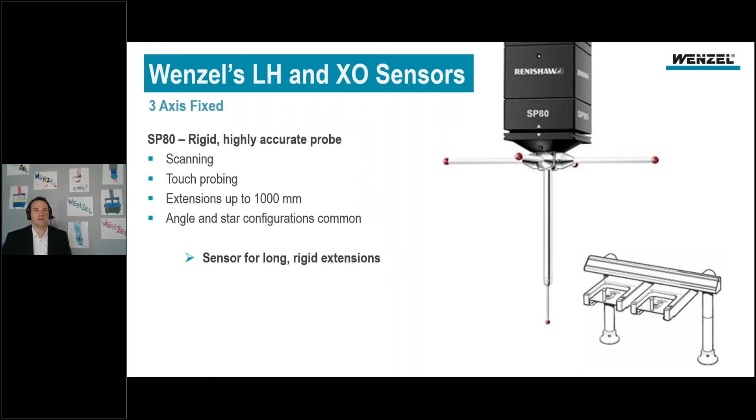So moving from a 3-axis fixed, we'll move into a 3-axis articulated probe. Articulation means we're still using the 3-axis of the machine to do the measurement. However, with a 3-axis articulated probe, you can now move the probe into different angles and positions. This eliminates the need for complicated configurations like star probes, crank probes, and allows more flexibility for the programmer to choose the angles they need.

This 3-axis articulated probe comes in 2 flavors, the PH10T and the PH10M. The PH10T is the most basic. It's for touch only, and you need to use manual threaded-in extensions. Where this would be appropriate is in an environment where you have very little changeover in parts, or maybe the parts are very simple, or where cost is of utmost importance for the customer.

Moving to the PH10M, M stands for multi-wire. This is essentially the most ubiquitous probe in the world. It allows you to use touch probes, physical scanning probes, and offers a wide range of compatibility with optical and laser sensors.

Because the PH10M is truly ubiquitous and is in almost every manufacturing shop in the globe, if you're a third-party manufacturer, you develop your sensor to fit on a PH10M. It could be a Nikon, it could be a Kreon, it could be something out there. Anything in the world, you're going to design it to probably work with a PH10M. That gives you a lot of flexibility as a customer.

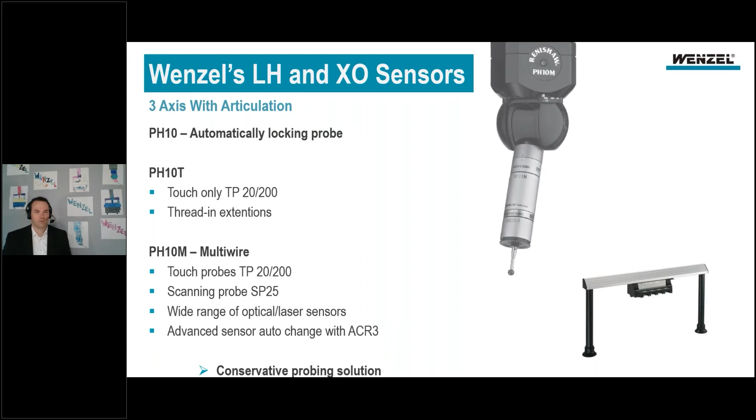So moving from our 3-axis as we continue to get more and more flexible, now we're going to move into 5-axis touch probe. Where 3-axis was the machine doing the measurement, now we're using the machine and the probe together to do the measurement, which is 5-axis, the 2 on the head and the 3 in the machine.

This is the PH20 touch system. This allows the machine and the probe to work together to take measurements in a very high-speed fashion. Now, I can talk a lot about this, but it's kind of hard to describe how quick and how much 5-axis changes this situation. So I'm going to play a quick video for you.

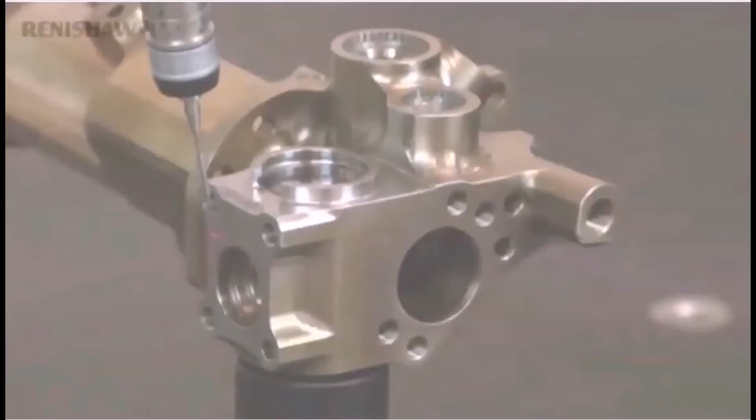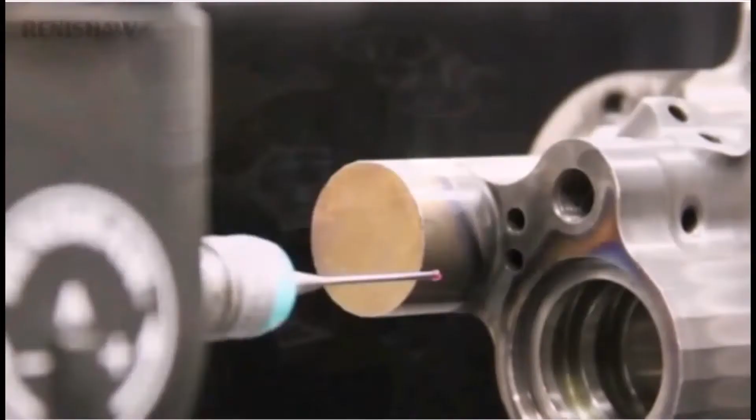As you can see, the probe head is positioned by the CMM, and then it's taking measurements on its own. It truly is an incredibly fast solution.

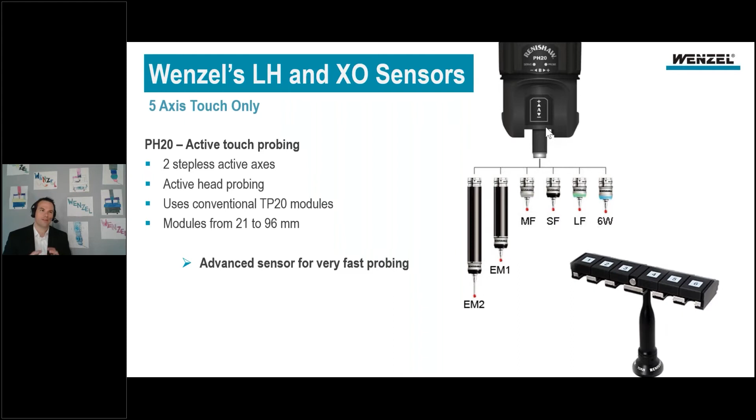So if we take all of these probing technologies and combine them together, that's where we're going to lean into the Revo system. The Revo system is a truly revolutionary sensor system that our CMMs are built and designed to carry. It not only has long styli, it not only has multi-sensor, but it's also 5-axis movement.

It's also 20 times faster than a traditional CMM. Traditional CMMs of whatever brand use a scanning probe that has a maximum scanning rate of about 25 millimeters a second. The Renishaw Revo can scan 500 millimeters a second. Now, I've talked to application engineers, I've talked to competitors, I've talked to customers. This isn't just a marketing blurb. It truly does run at that speed, and some people say it's even better when it's running faster.

Now, the Revo is the most expensive solution I've provided to you so far. However, it's completely revolutionary, and it changes the way we have to think about CMM measurement. With it being a multi-sensor technology, you not only have the incredible high-speed scanning and high-speed movement for touch, but now you can add a surface roughness probe.

You can add a 2D optical probe. You can add a 3D optical probe. So you're taking all of these setups that are traditionally placed around the quality lab. You may have a setup for surface finish and have a person there. You may have handwritten reports. We're taking all of that and we're bringing it onto the CMM.

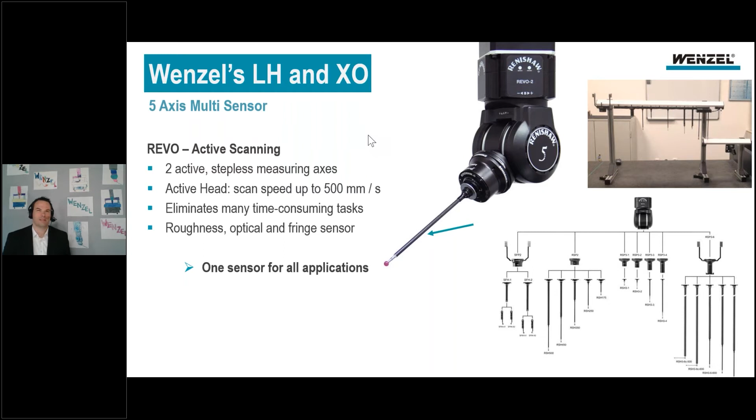By moving all of those setups onto the CMM, now we have only one piece of equipment to maintain. We only have one piece of software to maintain and learn. We have one knowledge base that we need to teach, eliminating all the rest of that complication.

So it truly is a different way to think about how a CMM can be incorporated into a quality system. So now that we know a little bit about the technology that can go on the CMM, let's talk about how the LH and the XO are from the same family.

Also, interestingly, granite is a very light material. It was surprising, I had forgot about this, but in like 4th grade, I remember being in geology class and us talking about the crust of the earth and how it's all granite. And the reason that is, is because granite floats on all different types of rock because it's so light.

So not only is it a light material, but we can make it lighter. Why that's important is the machine is light, it can move quickly. It can stop quickly, it's more stable. So we core out the Z quill and the X bridge on every single machine to give you the rigidity and the stability of granite with also the very, very lightweight.

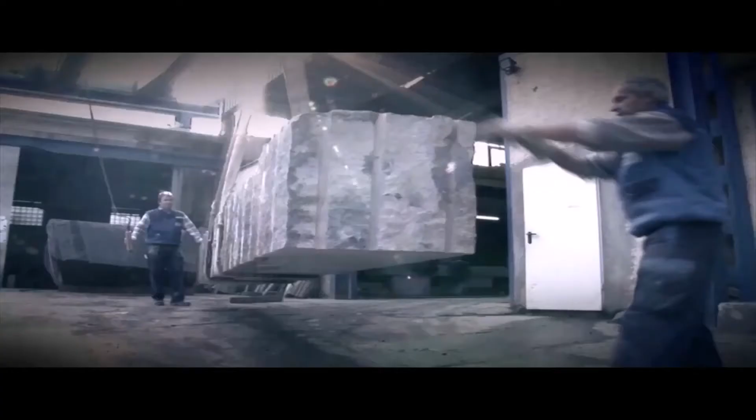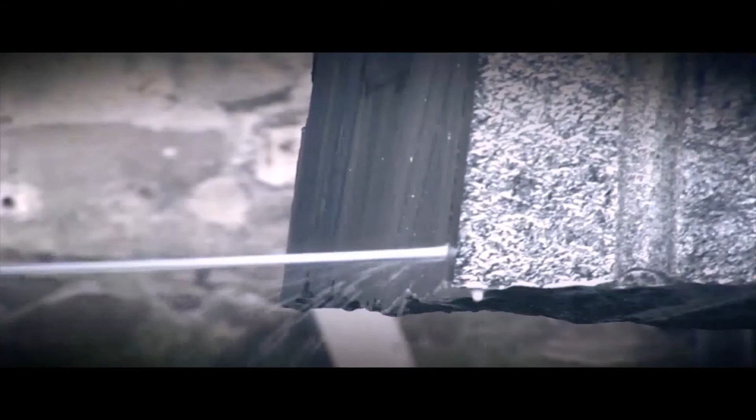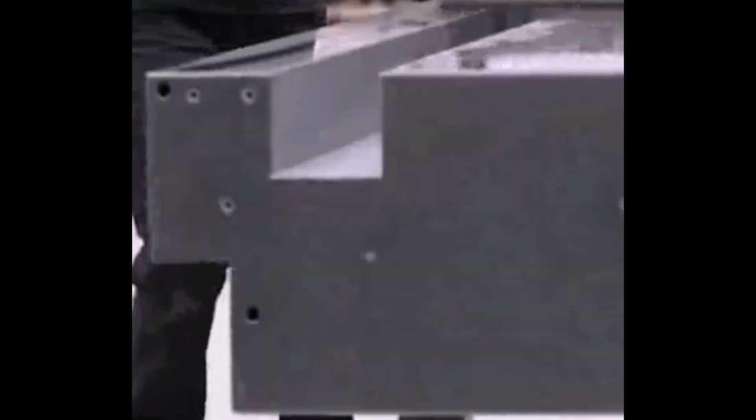You can see just how massive those blocks are. And then the hand finishing. Okay, so I'm going to pause the video here. This is showing one block of granite that has been machined to fit the bearing cage of the CMM. So it's all one piece.

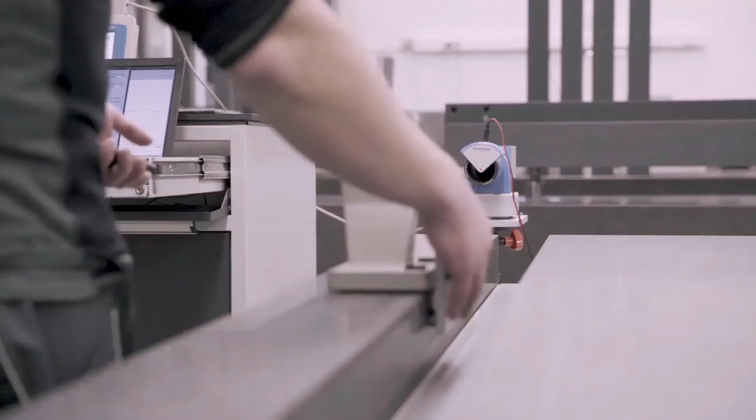And I'll keep playing this, but it's important in the next slide.

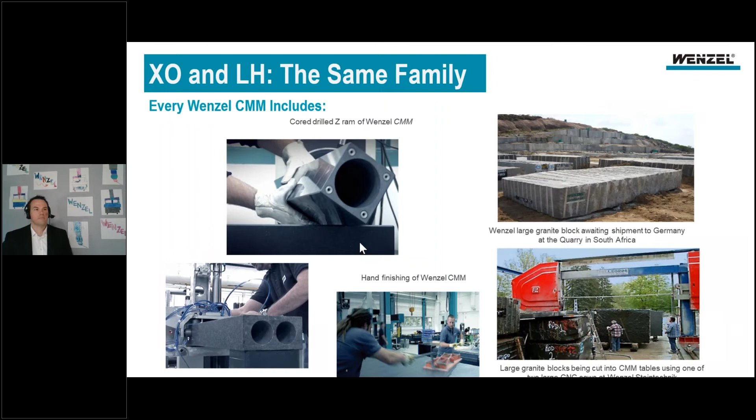That bearing surface is now lapped. It's all one part, it's part of the same piece. It's all lapped together. So not only are the bearings on both sides of the machine riding on a surface that's precise and the same, also your parts are living on a table that is the same flatness, same shape. Everything is the same. So that leads into the 3 points on why this is important: long-term stability, maximum mechanical precision, and they build into a low cost of ownership on every machine we sell.

Long-term stability: granite is millions of years old. It's formed, shaped, and done changing long before we mine it out of the ground. It's usually devoid of internal structures and is a homogeneous material, especially with our precision guys that go down and find the best granite. That material doesn't change, doesn't wear, doesn't sag, doesn't warp, doesn't age over time. It's almost eternal, so every machine we sell will have a physical structure that lasts a lifetime. Also, because the machine is made of the same very hard material, it allows us to give you maximum mechanical precision. The machines can be made very physically accurate and precise, and they continue to stay that way over time because the material is stable.

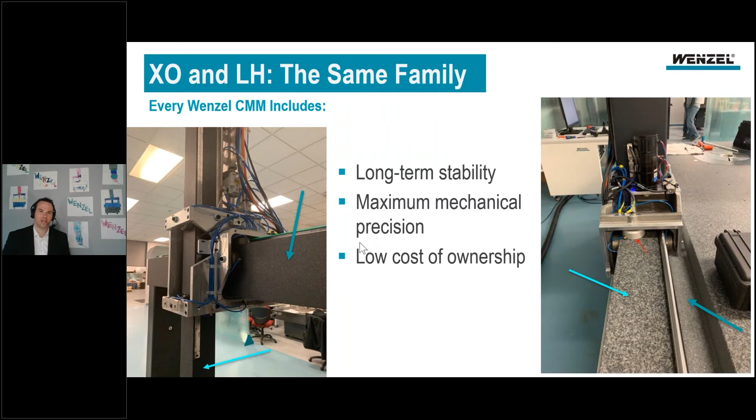Now that we know how the LH and the XO are from the same family, let's talk about the LH. When I was trying to come up with two words to describe the machine, I came up with flexibly advanced. Flexibly, because the machine is built around you, and advanced, because it is the epitome of technology. All of that research and development is going into sensors and better technology for these CMMs—you can take any advanced sensor you can imagine in the industry and put it on an LH.

Let's start with a brief introduction to the bridge type LH machines. The bridge type LH machine can take every probe I talked about earlier—the Revo, the PH20, the SP80, PH10, PH10T—and it can also handle all of those third-party laser and optical sensors. It has a wide range of sizes, anywhere from 600 millimeters wide to 1500 millimeters wide. Look at those accuracy specs: sub-micron levels of accuracy on the 600 and 800 millimeter machines, 1 micron accuracy on the meter machine, and below 2 microns on a 1200. Very tight tolerances on these machines.

Also, not only are the machines flexible in how wide they are, but every one of these machines can be built to your size of parts in length.

So if you have a 600 millimeter wide machine, you can get that in 6 meters long, or anywhere in between. And that goes for all of these. That allows that machine to be built specifically and tailored around you.

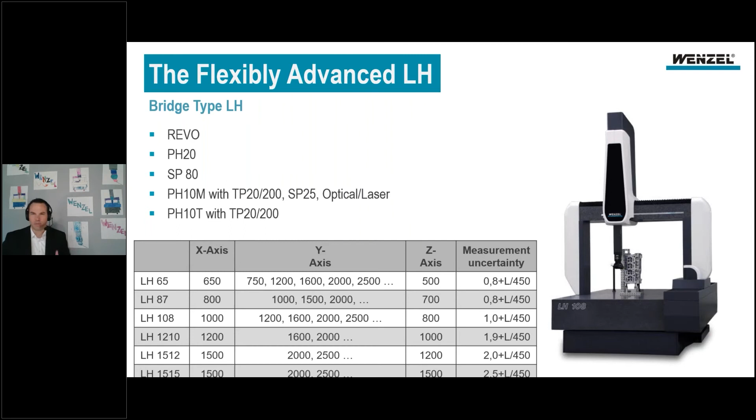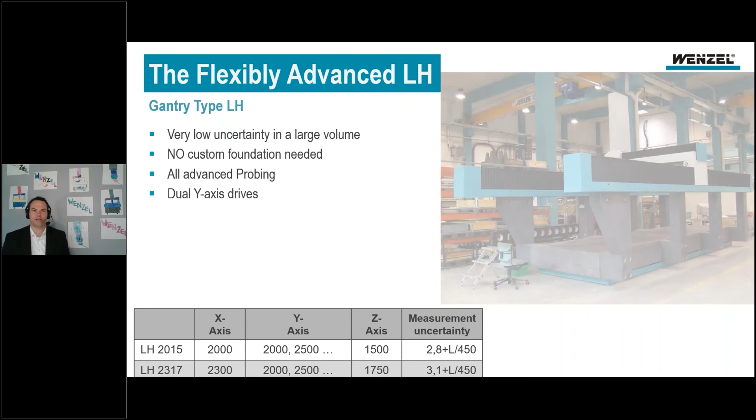They live forever. So if that's the bridge type, maybe you have a part that's bigger than 1500 millimeters. You need something a little bigger, but you need still really good accuracy. For that, we have the LH gantry style machine. The gantry style machine takes all the drive components and bearing components that are typically down low by the operator...

...and moves them up to the top of the machine. This allows the machine to maintain a very high accuracy, even though we're talking about a 2 meter, 2000 millimeter, or 2300 millimeter wide machine. Incredibly high accuracy with these machines for that size.

Also, there's still a standard machine. These do not need a separate foundation. So any industrial concrete floor that you have, these machines can be set on just like a normal bridge type CMM.

Sometimes though, 2300 millimeters is still not quite big enough. So that's where we move on to the portal type or LHF type CMMs that we sell.

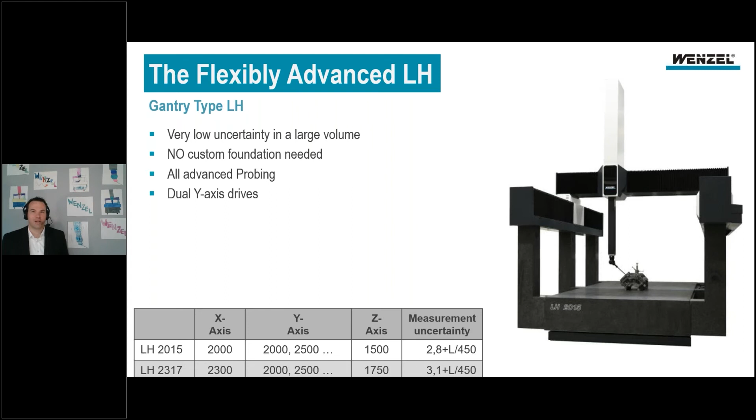These allow great part access. They're still riding on Granite guideways, and they're allowing you to measure parts 2500 millimeters wide, 3000 millimeters wide, 4000, 4 meters wide, and any length that you can think of.

Do you need something that's 3 meters long or 12 meters long? We'll make the size that fits your parts. These machines are fantastic at measuring large engine components, train engines, train parts, tanks, large automotive production or truck production.

And the interesting thing about this entire LH family is that all of these can take the most advanced probing system in the world. So a very common configuration for an LHF, a very large machine, is to combine it with a Revo, because again, you're getting that 20 times faster speed, but also incredibly long styli, which are important in these large applications. And time is money.

And all of these machines again are built on a Granite base. Even this one, those Granite guideways, even if you had it 20 meters long, are all made of Granite, and the bearings are riding on Granite. So it's all in the same family.

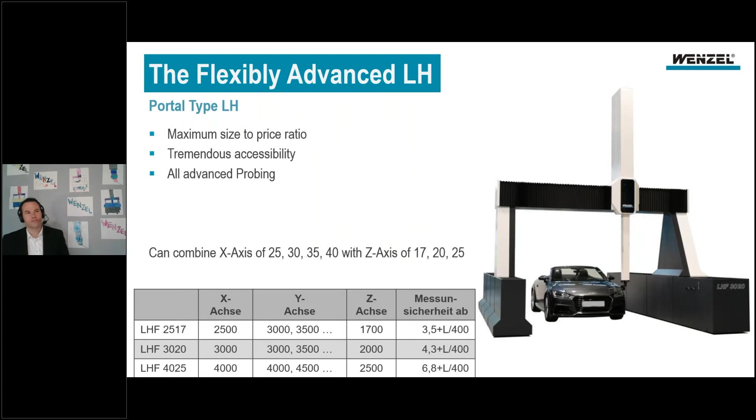So why is that? What does this do for us? Why is this important? What does this LH family all mean? Well, first off, it's designed for revolutionary sensors. These machines are designed to take anything a manufacturer can dream up, any advanced technology, and incorporate that in. By having the machine physically the best accuracy possible, it allows anything you can think of to be attached to the machine.

Secondly, customer specific configurations. Machines are truly built around you. They're built to suit what you need from the machine. You combine those two together and you get what I call a contemporary solution, a truly contemporary solution.

All of that R&D money. These machines are built for Industry 4.0. These machines are built for high advanced technical parts. These are not built for parts today. These machines are built for parts tomorrow.

There's plenty of applications out there that don't quite need submicron accuracy levels yet. But if you buy a Wenzel LH at a submicron level today, and you run into those parts 5 years from now, you still have a solution that's ready to meet your challenges.

The Wenzel LH is a machine that you stake, you put your flag in the ground and you accentuate your quality process. You're trying to show that off. You're telling your customers, I make the most advanced parts in the world, and I'm going to win your business.

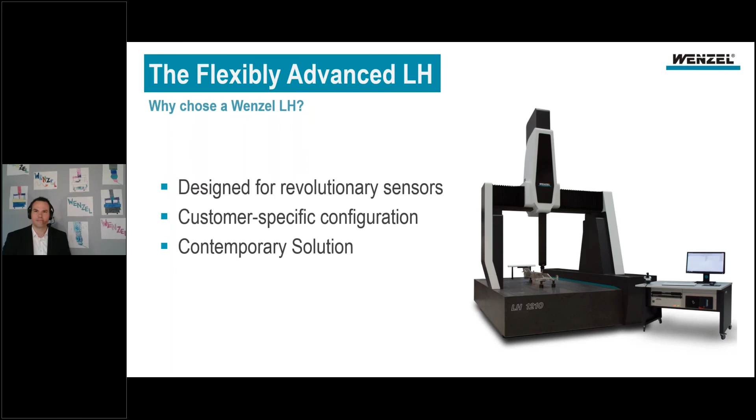So if we take all that from the LH, not every customer, not every part demands that amount of flexibility. Not every customer or part demands the most advanced technology. There are plenty, millions of manufacturers all over the globe that make just standard parts that make the world go round that we don't even think about.

It could be something in this headset. And for that, we took everything that's important about the LH, all the advanced research and development, we distilled it down. We took the most essential components, combined it all together, and created the XO.

So for the XO, I chose the two words sensibly robust. Sensibly, because it is the most distilled and essential version to measure your parts on. And robust, because it's still built on that same family values. It's still that long life material. It's still the same quality process. So it's going to last a lifetime.

So how do we take an LH, which is advanced and infinitely customizable, and distill it down? Well, one way we can do that is to limit the amount of sensors, or build the machine around the most common sensors in the industry.

The PH10 is absolutely ubiquitous, it's the most common sensor in the world. And the PH20 has been incredibly popular in the essentials kind of business. By limiting it to the most common sensors, it allows us to boil down and distill that LH into something more affordable. But it still gives you the PH10M with touch and scanning, all of the third-party support for optical and laser sensors, and that advanced 5-axis technology. So you're not giving up things, you're just focusing on what's truly important for this particular situation.

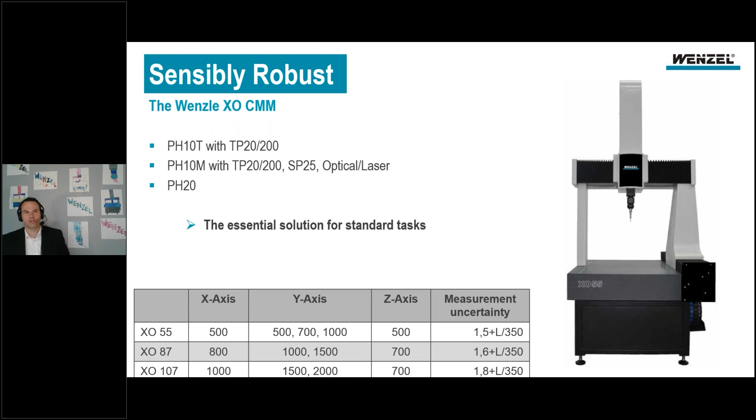So why are these important? What makes the XO special? Maximizing price to performance. Because this is distilled down to the most essential things, it gives you that economy-like price for a very premium, high performance product. So you're maximizing your investment for your price to performance ratio.

Next, it's going to be a more compact solution. Because it doesn't need to be designed to fit anything somebody can imagine, the machine can be smaller, it can be tighter, it can be shorter.

When we talk about this, what comes to mind for me is small locations - if you have a small shop or something like that - but it's just scratching the surface. Having a more compact design, there was a customer that has 40 of these in one location, and this customer could have bought 40 LHs or 40 of whatever. The money wasn't the problem, it was space. They had a given amount of volume in this shop, so they chose the XO over the LH just because it fit 40 of them very close together. So it can mean a lot of different things, but it's a very compact kind of design.

And if the LH is a contemporary future solution, then the XO is a foundational solution. With the LH, you're staking your flag and saying, Mr. Customer, I make the most advanced parts in the world, and I'm going to win your business. With this, it's something to build a quality process around. It's telling your customer, I take quality seriously, and I make your parts well. I make some of the best parts in the industry, but I want the most efficient solution.

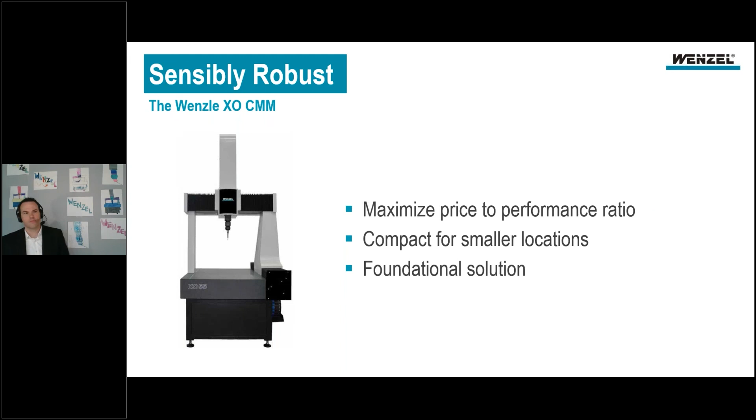So where that leads us is the end. And we ask ourselves the question, what system is right for you?

As a salesperson, I often hear that a salesperson's job is to sell things, doesn't matter what it is. And that's actually not true - that's a very old way of thinking about it. As a salesperson, our job is to educate, our job is to make information available. You customers are all very smart, everyone in the world has the internet, we can all do our research. The job of the salesperson is to provide you with the right information to help you make the best choice, even if that choice may not be a product I have today.

So I'm hoping with this presentation I've given you some information, enough to be dangerous to make a better decision, and I hope that you learned something today. So ask yourself, and ask me in the comments or in the chat, what system is right for you?